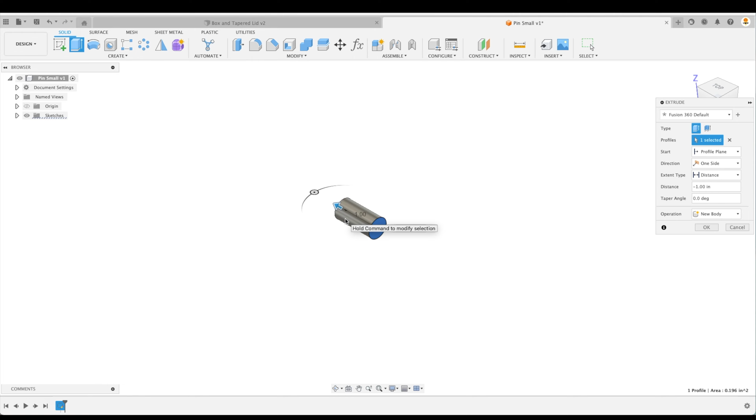In this tutorial, you will make this power piston assembly. You will create each individual part, including the small and large pins, piston, connecting rod and flywheel. We'll assemble all the parts and then verify the assembly by creating a motion study.

Let's do it. So the first thing we're going to talk about with this tutorial is in previous tutorials, we have done something called in-context design. Or as you can see in our browser, we have created two parts within our assembly and have done that within one project. But with this tutorial, we're going to do something a little bit different.

Sometimes we don't have the luxury to create an in-context design. We might be given files from an outside source and have to input that into a project and then model around that file. Or we might have to input several models that have been sent to us and create an assembly based off of those files. So we're going to take that approach today.

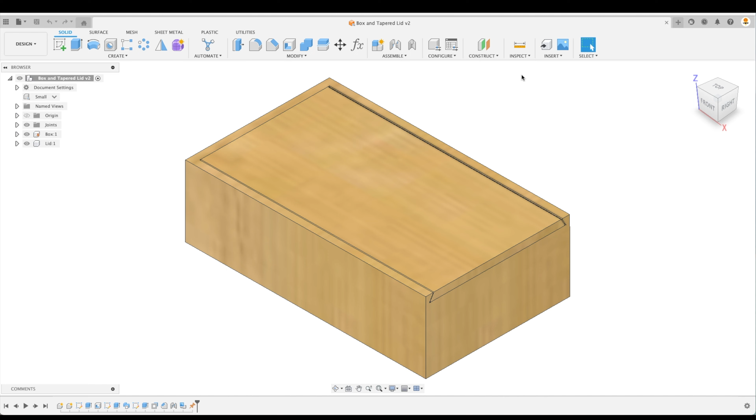So let's open up a new design, and we're going to save everything under one project. And here I've named the project Power Piston Assembly Tutorial. So when we locate that folder, all of our models will be saved within this particular folder. And then we'll create a master assembly file where we will input all of those individual files into.

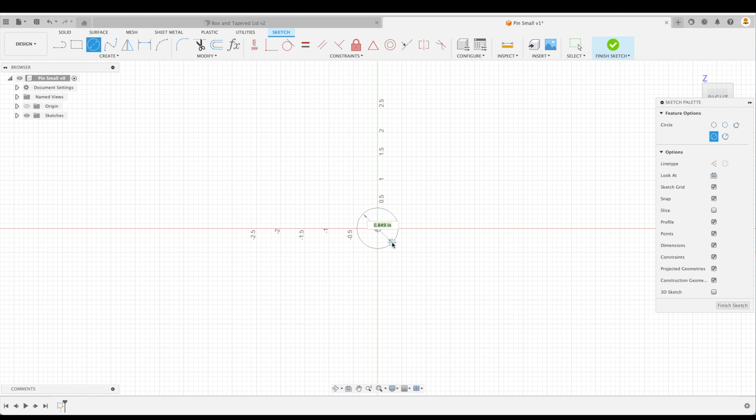So let's get started with the most simple aspect of this assembly. Let's first of all create our pin. So let's save it and call this pin small. And this is very simple. We'll create our sketch on our YZ plane, center diameter circle. So it'll be 0.5, finish sketch, and we will extrude this 1 inch. And that's it. Let's save it. You can see as we save it, it will be located in our folder under Power Piston Assembly Tutorial.

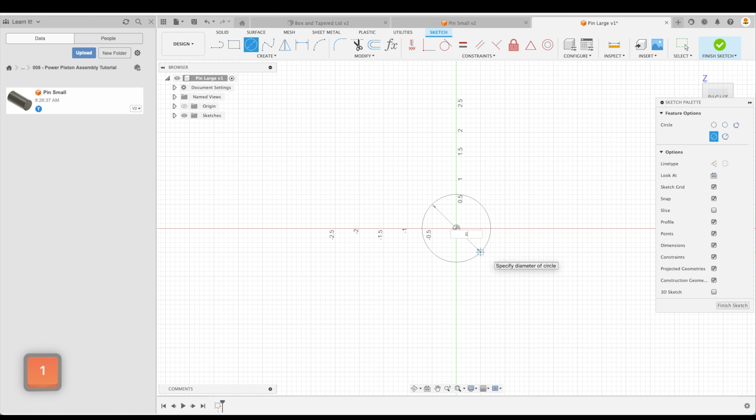So now let's create our large pin. We'll save it. Pin large, and for most of this tutorial, I'll just leave the browser up here on the left. So here we'll create another sketch on our YZ, and this one's going to be 1 inch in diameter by 1 inch long. So E for extrude, and we'll go the opposite direction 1 inch, and that's it. Now let's do our next one, which is our cylinder.

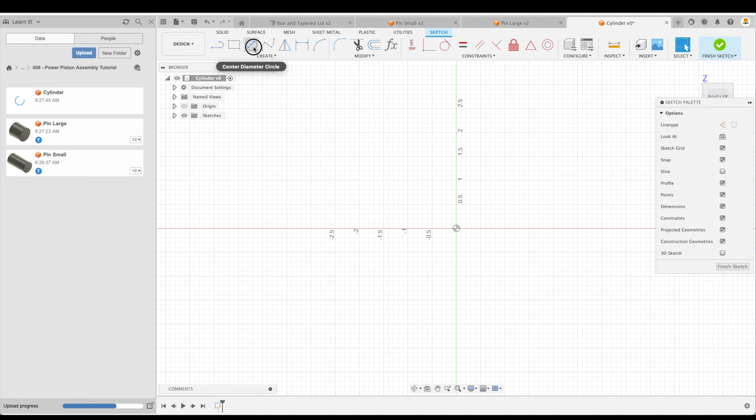So sometimes if our part doesn't show up here on the left, which we have just saved, we can refresh it, and it should show up on the left. So let's save this as our cylinder. And again, we can create our sketch. Now this one is 2 inches in diameter with a bore set at 1.5 inches. So we can finish that sketch. And now we can just extrude that outer profile. And this is going to be 5 inches long. And that's it. Let's save.

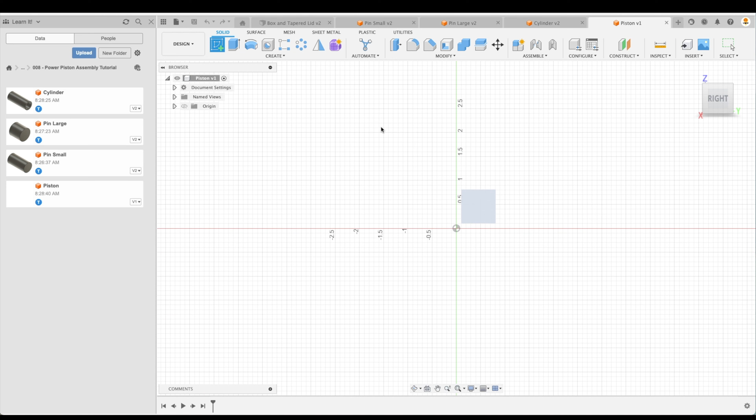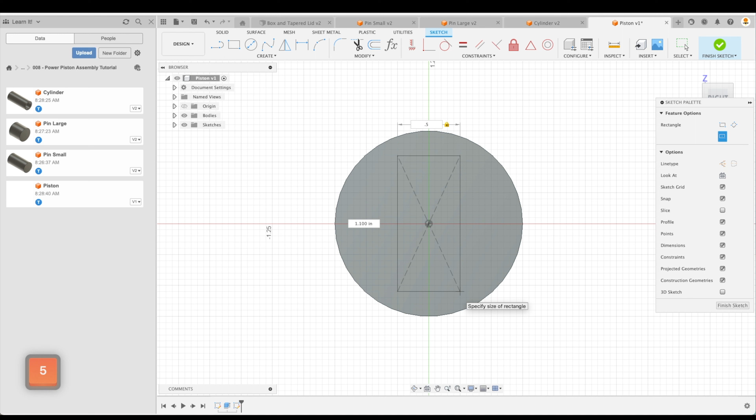Next, let's do our piston. This is going to be a solid body on our YZ plane of 1.5 inches. And we can extrude that -5. And let's create another sketch on our front face. Make sure not to pick the YZ plane, but the front face of our cylinder. And we'll create a center rectangle off of our center point. And this is going to be 0.5 by 1.25 tall. Finish sketch. Now we can extrude that profile. This is going to be 1.5 inches long.

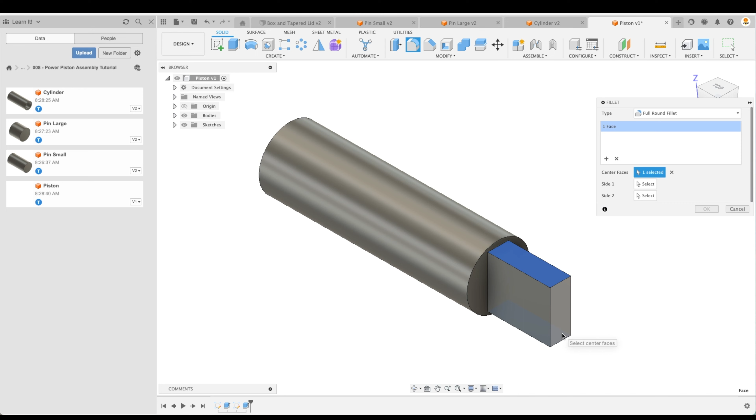So for this, we can create a fillet and make sure to select full round fillet. Now you can see as I hover my mouse over the face here, the side walls turn blue. If I were to click right now, the fillet is created in this direction. So that's not good. So all we have to do is move our mouse down, and you can see now our blue faces are going to be on the top and the bottom. And if we select, we'll create a full round fillet from top to bottom in this instance. Let's go OK.

Now we can create the hole in the middle here. Let's create a sketch there. Now we can just create a center diameter circle. And again, we can use constraints to make sure that it is perfectly placed right in line with this fillet, or we can say concentric within that fillet. But just to show you how easy it is to create using constraints, let's just create the circle off of here, our bore of 1/2 inch.

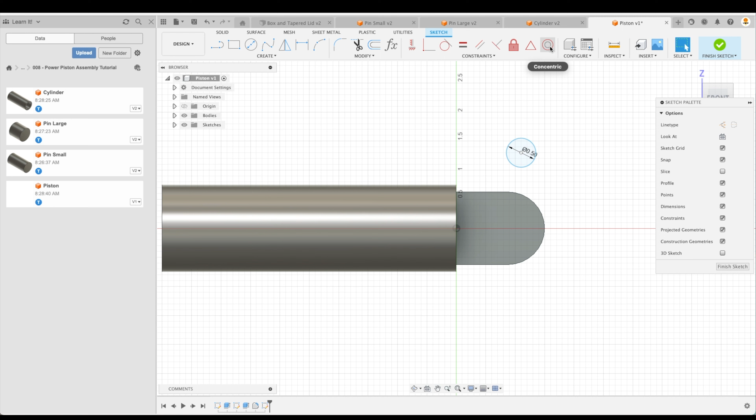And then use the concentric constraint. So we'll click on that, click our circle, and then just click our radius here. And there we go. It's perfectly placed in line or concentric with that profile. Let's go finish sketch. And now we can extrude this. Make sure to go to object, and we can just pick the other side of our piston there.

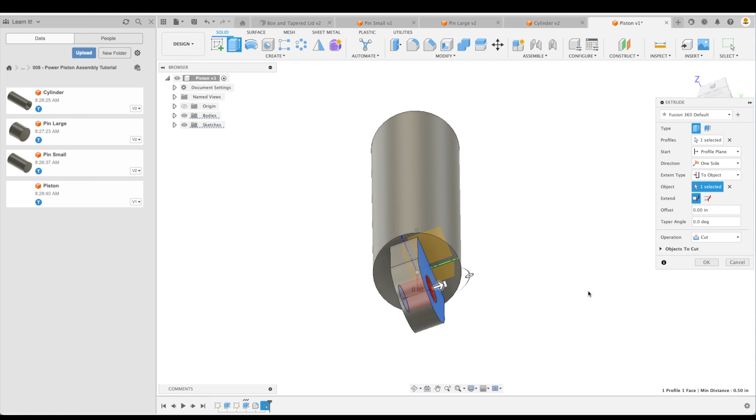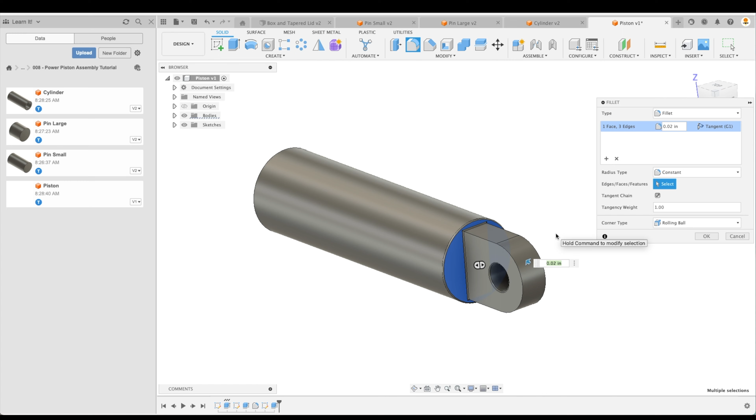Okay. So now we can go up to fillet and make sure to select our regular fillet. And now we can actually select this entire face here and just put a tiny, let's go a 10 thou, maybe a 20 thou on there. Perfect. And we are good to go. Why don't we add these two as well? Okay, now the piston is finished.

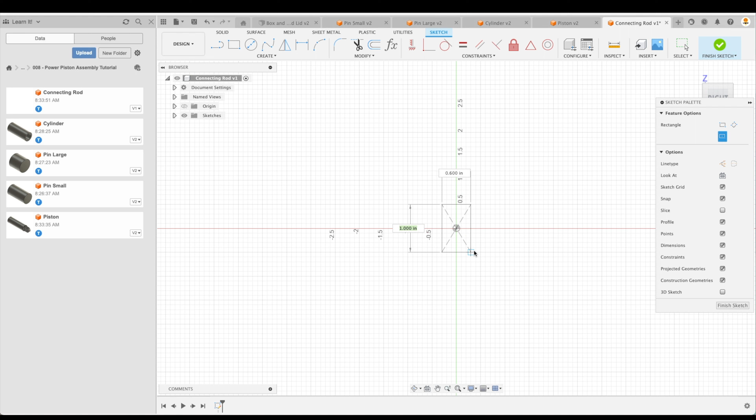The next is our connecting rod. So let's save that right away and call it connecting rod. So the first thing we can do is create a sketch. We'll create it on our YZ plane as well. And this is going to be a center rectangle. This is going to be 1 inch high by 0.5 wide.

And we can extrude that. This is actually going to be a calculation. We can go 9.625 minus 2 inches. And a good thing to remember while we're modeling is do all of the primitives or primary shapes first, and then do the fillets and the rads and the holes at the very end.

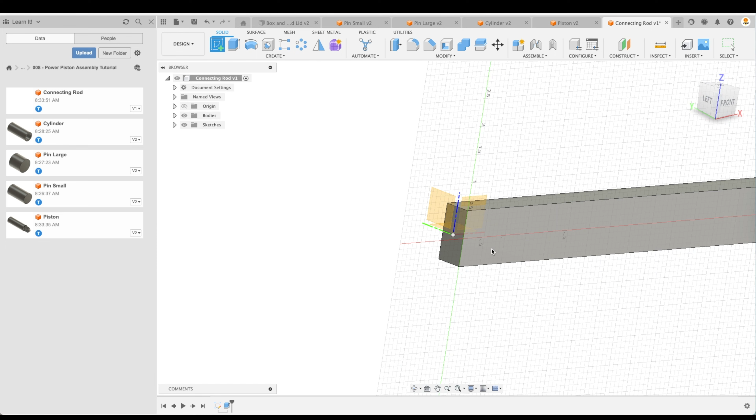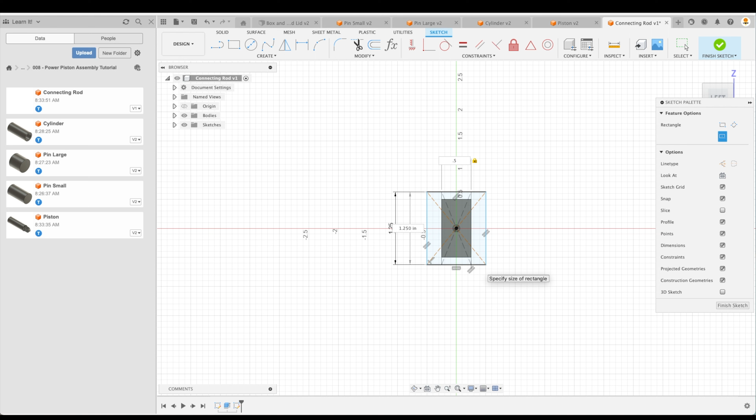So let's do the other side of our connecting rod here. We'll create a sketch on this face and another center rectangle. This is going to be 1 inch wide by 1.25 tall. And it's actually going to have a 1/2 inch spacing in the middle. So we can just put this at any distance as well and then constrain it later, or we can just specify 0.5 right there.

Now you can see that there's blue lines up here, and that's because it is not constrained. So if we hold down our left mouse button, we can pick that individual line, and there we go. You can see it's not constrained. So if this happens to you, it's best that we create a collinear constraint between that line and this, and then everything will turn up black. Now this still has not been constrained. I didn't specify a dimension for that, so let's just go D. We can pick that edge, and call this 1 inch exactly.

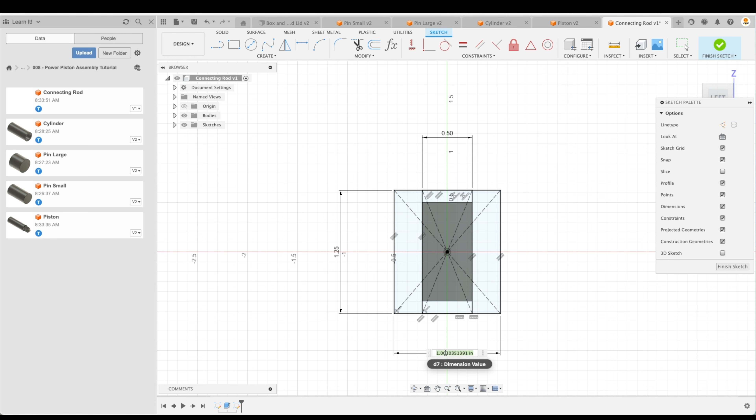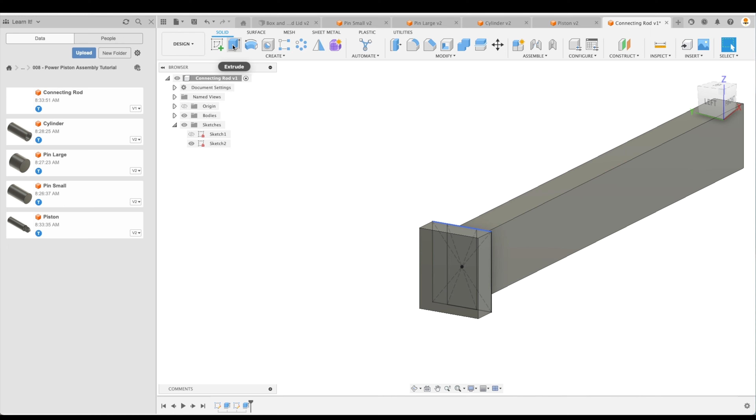Let's finish our sketch. Now we can extrude it. So let's extrude this. And actually we'll extrude all of these. And this is going to be 0.375. Now we can bring up that sketch that we just made, because we're going to extrude just those outside profiles, and we can hide our body there. Let's just extrude those outside profiles, turn back on our body, and these are going to extend 2 inches, and make sure that our operation is not set on cut, but rather join, and that will join everything together.

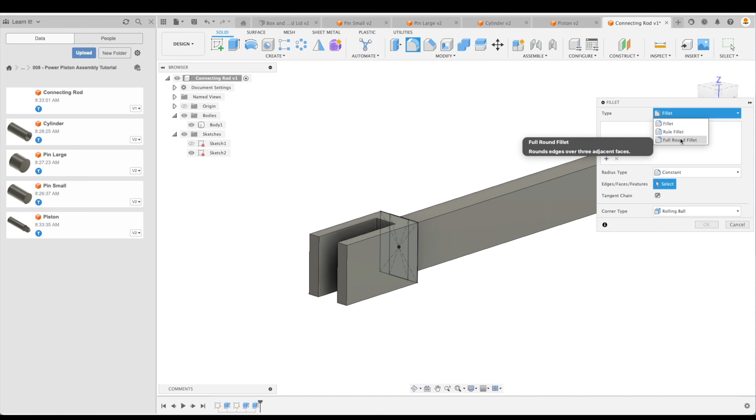Let's go OK. Now that we have our primitive shapes, we can add our fillets. So let's go there, fillet. And we can go full round fillet like we've just talked about. We can select that. I'll have to add another selection set right there. And another selection set on this side. And make sure to hover our mouse so that the blue faces go on the top and the bottom. There we go. Let's go OK. We can hide our sketch now over here. And all we have to do is add our holes and then some of our tiny fillets.

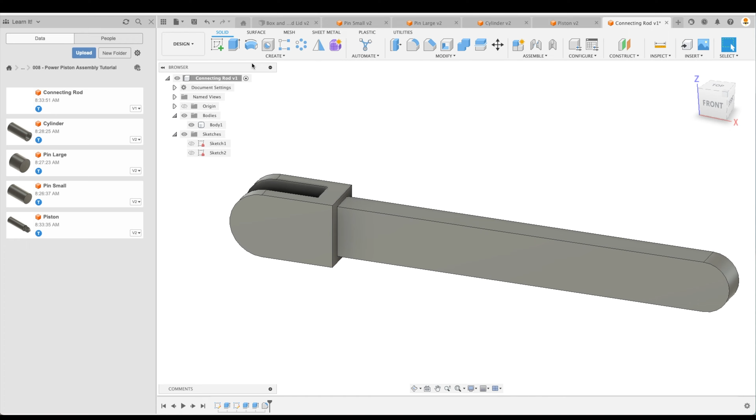So let's do that. Create sketch on this face. Again, we can create a circle off into space. It can be anywhere really. This is going to be 0.5, and then make it concentric to our profile there. Let's finish our sketch. And I like to create all my sketches at the same time if possible, so I'll select that face as well.

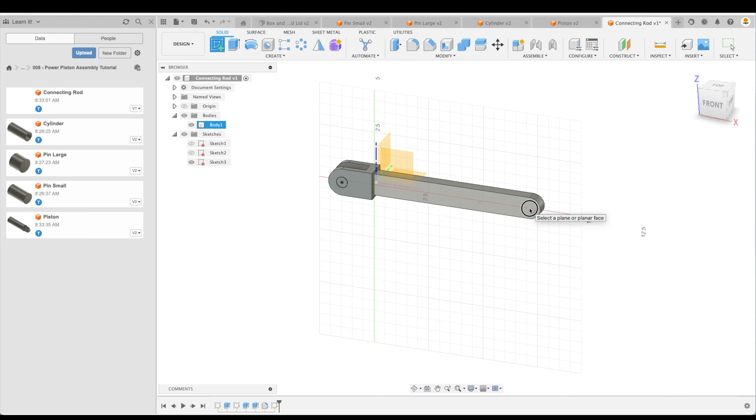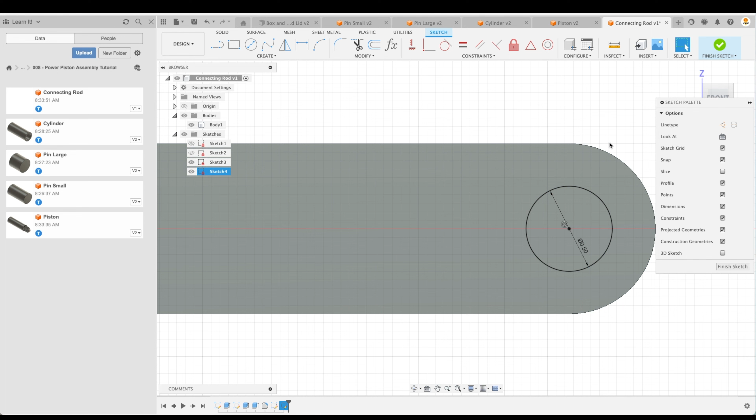We can also just select our circle, hover over that, and you should be able to see a little circle symbol show up. And this is the center point of our rad. And as you can see, the concentric symbol shows up there, which means that our circle is perfectly concentric with our outside profile here. So let's go finish sketch. And now we can extrude that and go to object, which is the other side of our connecting rod. Go OK. And we can do the same thing here. Pick that, distance to object, the opposite side, and go OK.

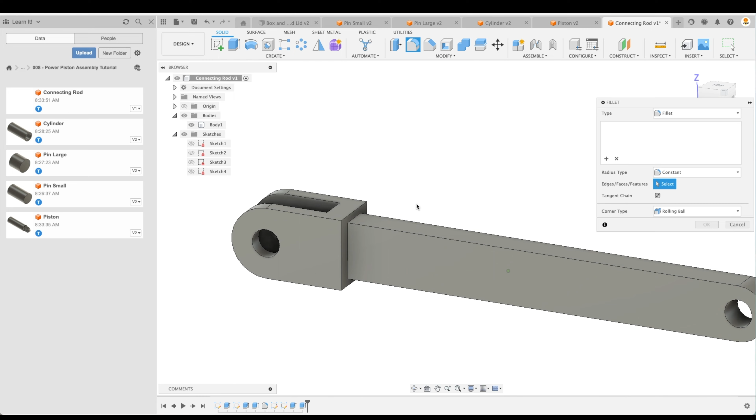Now let's just add a couple small fillets. Make sure to select our regular fillet there. And again, we can pick that entire face, and we'll call that 25 thou as well. And why don't we pick all those? Perfect. And these ones as well. Okay.

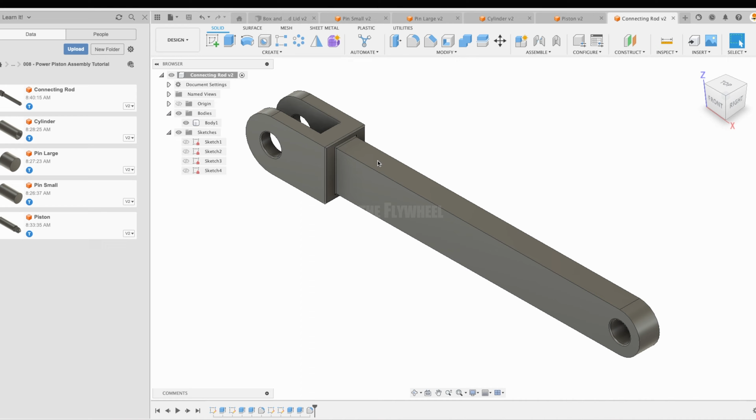Now last but not least is our flywheel. So let's save that as our flywheel. And this, I think, is the funnest part of this project. So let's create our sketch now on our XZ plane. We'll create the outer profile of our flywheel first, which is 4 inches. And we can actually create all of our different profiles at this point too. So our center circle is 1 inch.

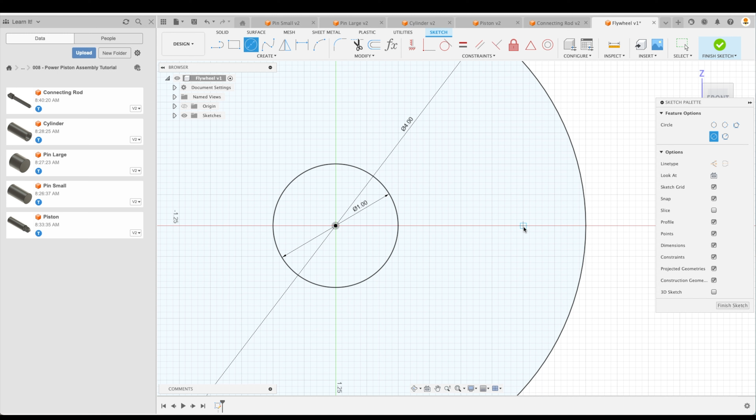And again, to select the previous tool that we've just selected, we can right click and there we go, repeat center diameter circle. Now we want to create a through hole over here. And as we select our x-axis, we can just snap it right to that. This is going to be 0.5.

But as you can see, it is not constrained to anything. We can move that. So we have to make sure that this is fully constrained. We can do that by selecting the horizontal vertical constraint. We'll select the point there and our midpoint. And now all we have to do is a dimension from our center to center. And this is going to be 1.5. And it should turn black now, fully constrained.

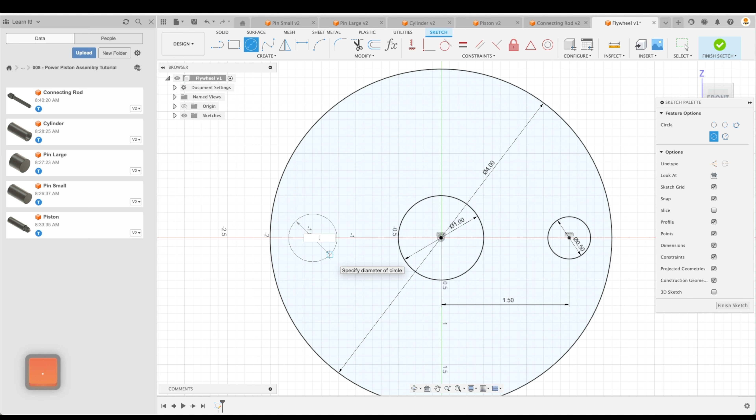So we're going to do the same thing on the other side, which is going to be our wheel. This is going to be 0.5. And we'll make it the same spacing from there to there. We can actually just select our dimension over here to input it into our current dimension. So let's do that. And you can see that it is not constrained. It's still blue. And which direction does it need to be constrained?

Well, you can see as we click and move it, it often gives an indication of what needs to be constrained. So let's just pick our horizontal vertical constraint and we'll pick the 2 center points. And there we have it. So let's finish our sketch.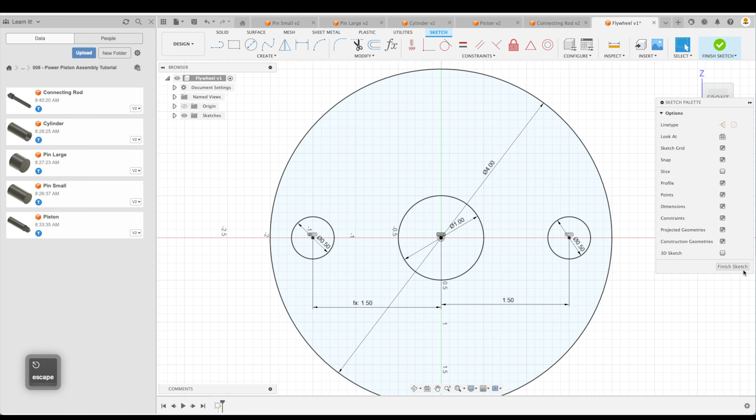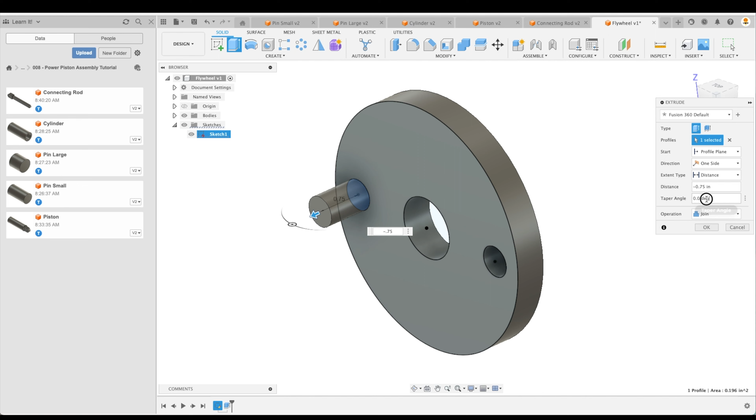Now let's extrude these 2 profiles in this direction, and it's going to be 1/2 inch. We'll bring our sketch back up because we want this profile to be going the opposite way. So we'll pick that and we'll go opposite minus 0.75. And we're going to add a little taper angle to this. Let's go 10 degrees and it puts a little handle on there. So let's go OK. And we could also put some fillets on there if we wanted. Let's do 1, 2, 3, 4, and call that 25 thou as well, and save.

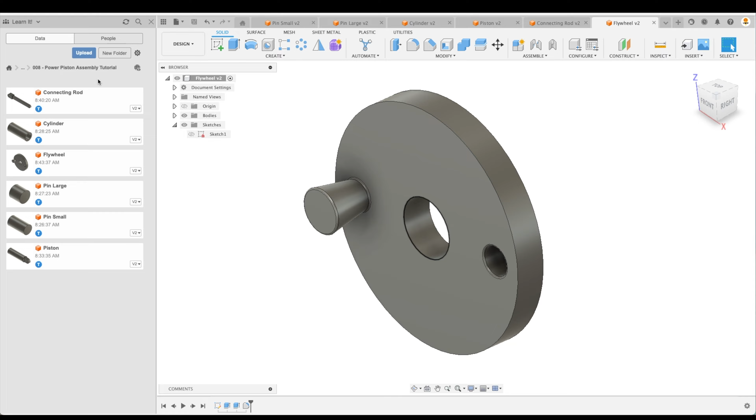So you can see that in our data panel, we have all 6 files that we've just created. So now we can create our master assembly file. We'll create a new design, save it, and this will be called Power Piston Assembly. Let's go save. So now we just input one of these files or models at a time into our master assembly. So let's start off with our cylinder.

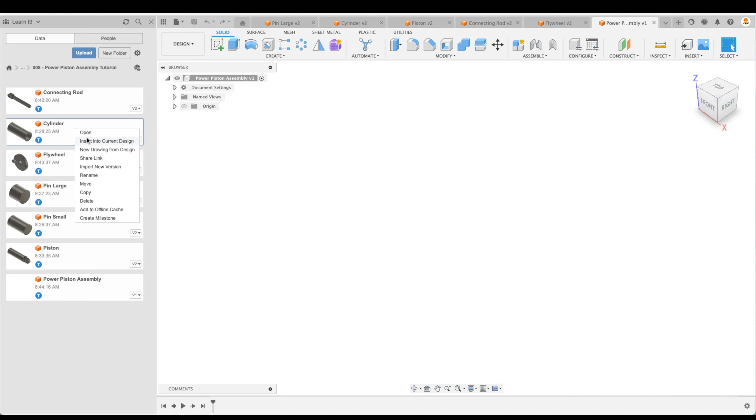So we're going to right click, insert into current design. We've inserted our cylinder and we can go OK. We could move it or orient it if we want, but let's just go OK. Now we actually want our cylinder not to move at all. So let's just right click that cylinder and ground it. If we don't ground it, it's going to be flying all over the place as we move our piston assembly. So the next thing we want to do is input our piston.

So here we have to make sure that our assembly is activated. If we have a large assembly of many different parts, we may at some point activate an individual model. And as we insert a new model into the design, it will actually put it underneath that model rather than underneath the assembly file as our parent file. So just keep that in mind; if I do it accidentally or have an opportunity to show it, I will. But let's just keep on moving here.

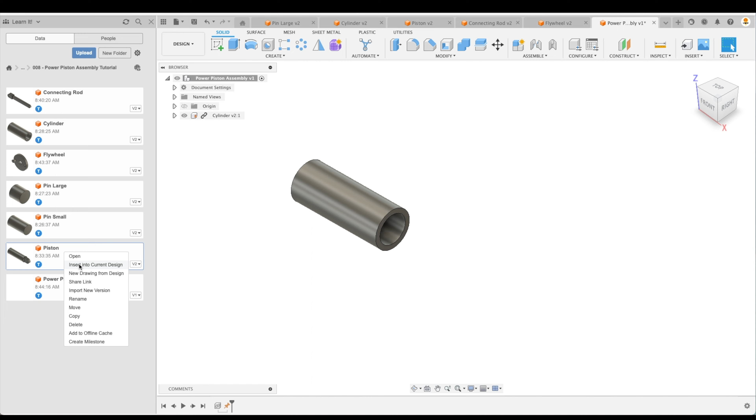So let's go to our piston now, and we're going to right click, insert into current design. And it's actually positioned exactly as we want because that's how we've designed it. So let's go OK. But if it's not positioned exactly where we want, maybe it's off to the side, we will have to joint it. Or we're going to have to joint it anyway, so why don't we do that right now? Let's go joint. And remember the fundamental rule, this to that in Fusion 360.

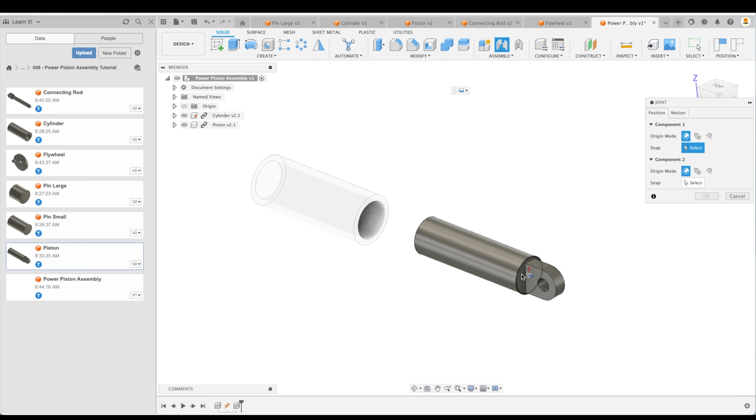So the first component that we pick is this, and we want to move it to that. So this to that. And that's why our cylinder turns up transparent. We can't actually select anything on it because we can't move that. That kind of gives you the indication of which component needs to be moved first. So we need to snap a point on this to a point on our cylinder. Now I want to snap the center point of this face to the center point of that face. So let's do that. And this is fundamental.

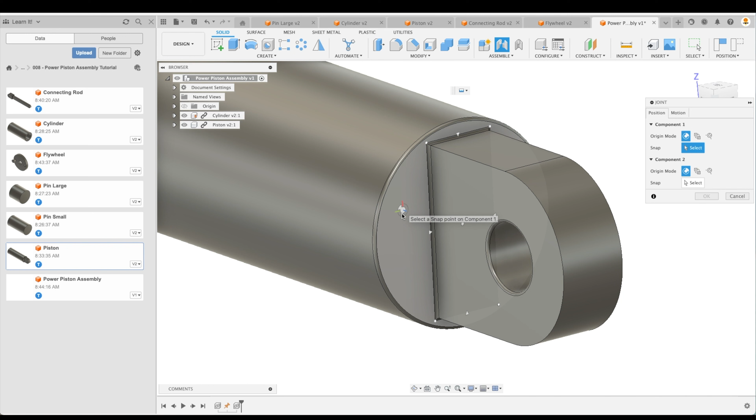If you can really pay attention, some of my students just don't understand this concept, and I'm sure that others out there don't as well. So here we want the center point of this face. And as we move our mouse over, you can see it selects this face instead. But no, we want that center point. So how do we do it? Well, there's 2 ways of doing it. We can select our face, we can click it. And there, now we can pick anything on that face without it selecting anything else in our model.

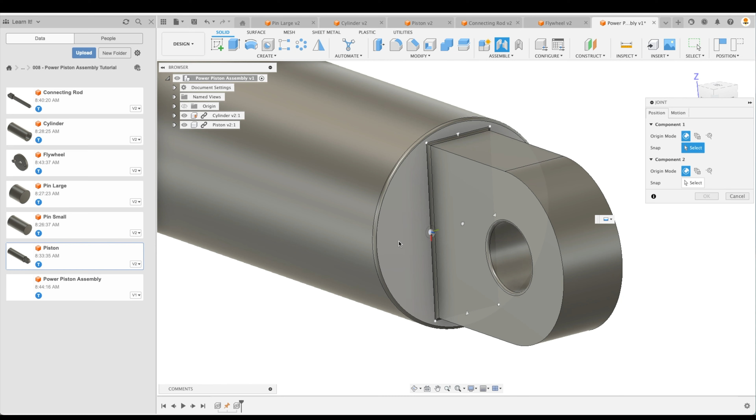So we can do it that way, or we can simply hold down Command on a Mac or Control on Windows, and you can see it does the exact same thing. We can pick any point on that face that we have pressed Command or Control. So we can do that, select that point. Now that turns transparent, and we can do the same thing over here.

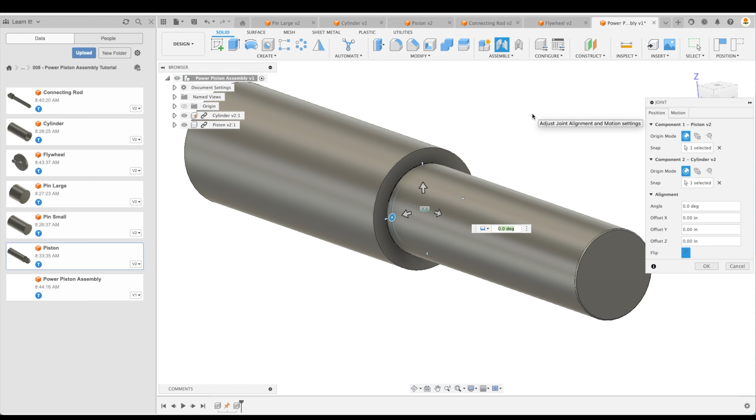This we absolutely need to do. I'll do the other method. I'm going to click on that face, and now we can select the center point. So you can see Fusion says, well, this makes more sense if we orient it like that. Simple, we can just flip it, and now our piston and cylinder are properly jointed.

Now we want to make sure to add some motion to this. So let's go to motion, and our type is going to be slider. And you can see it's sliding in that direction. That's great. It might be the opposite axis that you've picked, or it might be another axis that you've picked by mistake. So if it is, don't worry, just go down to our direction here and make sure that the correct axis is selected. Now we can also add a custom axis if we want, but in this case, one of the three will work.

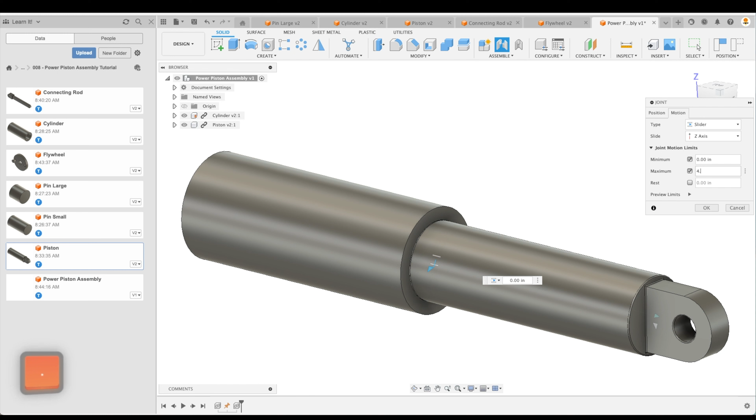Now we want to add some motion limits to it as well. Our minimum is going to be 0. Our maximum is going to be the length of our piston, which is 5 inches. Well, we shouldn't actually do all the way to 5 inches. In real life, that wouldn't work. The piston would obviously fall out. So we're going to go to 4.75. There we go. And our rest is going to be back at 0.

So again, this is the default position of our piston and cylinder. When we hit OK, even if we are off into space over here, oh, there we go. So as soon as we hit stop, it will go back to our rest position, which is at 0.

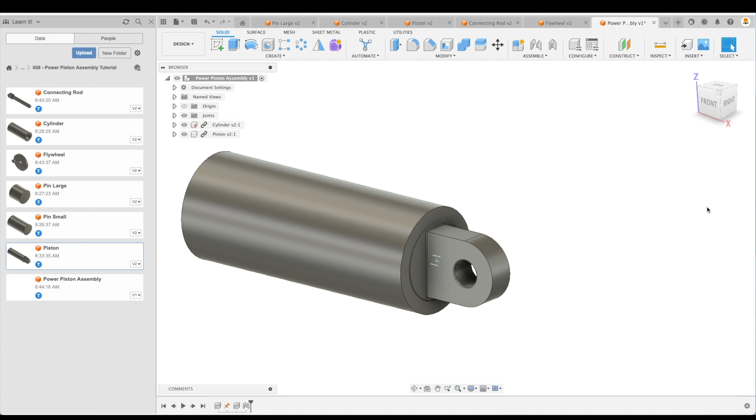Now the next thing we're going to do is add the small pin over here. So let's go there, insert into current design, and we're going to move this small pin off over here. We don't actually have to orient it right now. We can if we want, but I'm just going to leave it at 0 degrees just to show how easy it is to join two components together. Let's go OK. So let's joint, and we can snap our first pin over here to our piston.

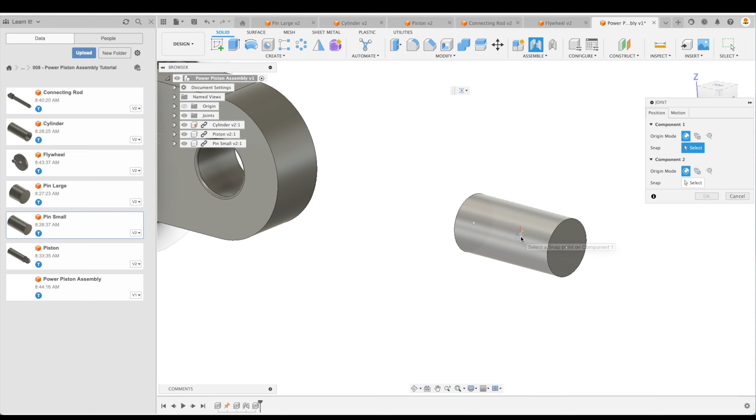So as we hover over a cylinder, you can see that we only have 3 snap points. We can't pick anything on the diameter because the diameter has an infinite amount of points. It doesn't know which to snap to. But as we hover over the center of our cylinder, there we go. We have a center point that we can snap to. So let's do that. And we can snap to the center point over here.

How do we do it? Well, same principle. We can hover our cursor over that cylinder, press Command or Control, and now we can select that center point. Remember, we can pick any snap point that's found on that. So we want to go to the center and click it, and look, it automatically orients our pin in the correct orientation.

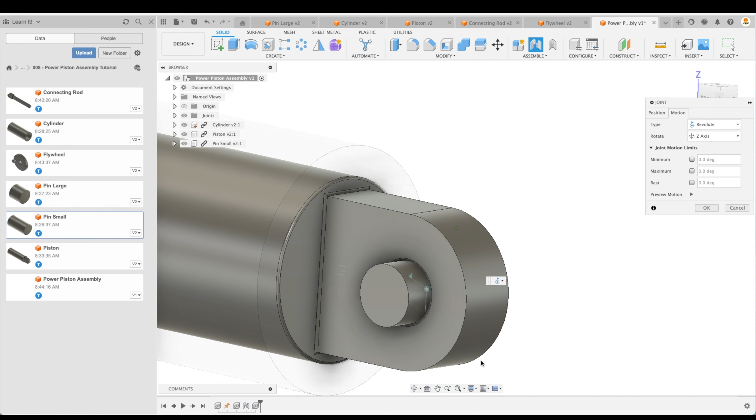Now, obviously, we don't want a slider motion to exist here. So we want to change this back, and we want to turn it to revolute. And here you can't see it doing anything because it's a round object, but you could see that little wheel, the motion limit wheel here, spin. So this is perfect. We can actually go preview motion, and there we go. We see that our pin is revolving 360 degrees, no problem. Let's go OK.

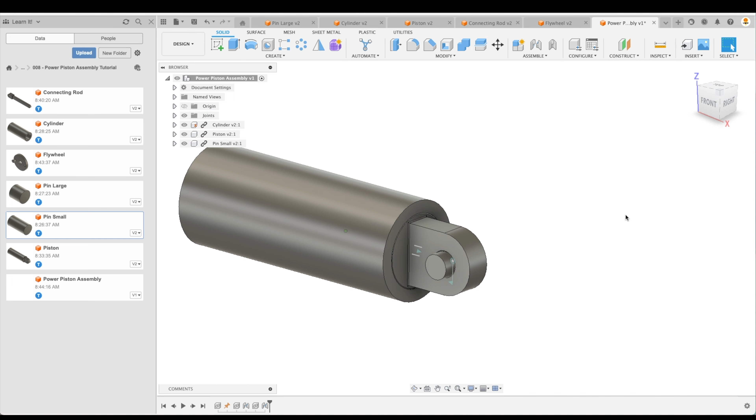Now let's assemble our connecting rod. So right click, insert into current design. Again, here we're just going to move it off into space so that we can see it a little bit more. And now let's go joint, and we're going to choose a different type of joint here because as I hover over this cylinder, you can see that our center point, we want the center point between both cylinders, right dead center of the connecting rod. So how do we do that? Well, this is quite easy.

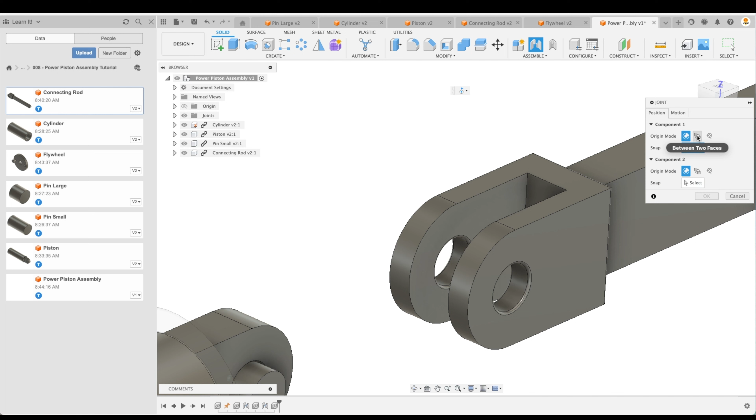You can see under our origin mode here, right now we have simple selected, but we want between two faces. And just look at our little dialog window: creates a joint origin that is centered between two selected faces to position components. So let's do that. We're going to select that. Now plane 1 is going to be this plane or this face, and plane 2 is going to be that. And now it asks for a snap point. So we can hover our mouse over here and select any snap point we want.

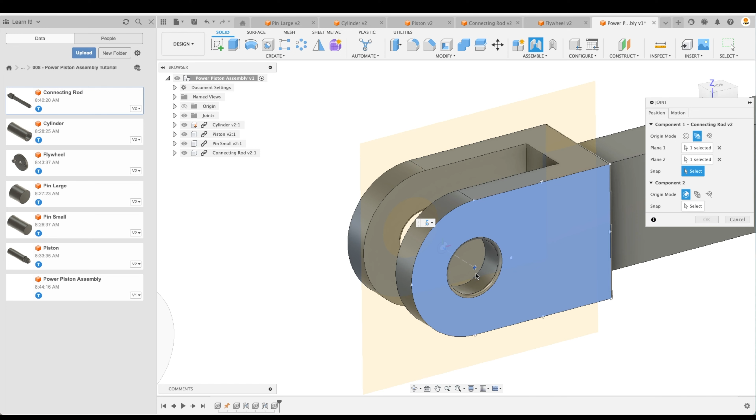So again, we're going to hover over that face, hold down Control or Command, and then pick the center. As we orbit a little, you can see that the center point is right there. So we're going to select that, and your center point should be right in the middle of your two bored holes.

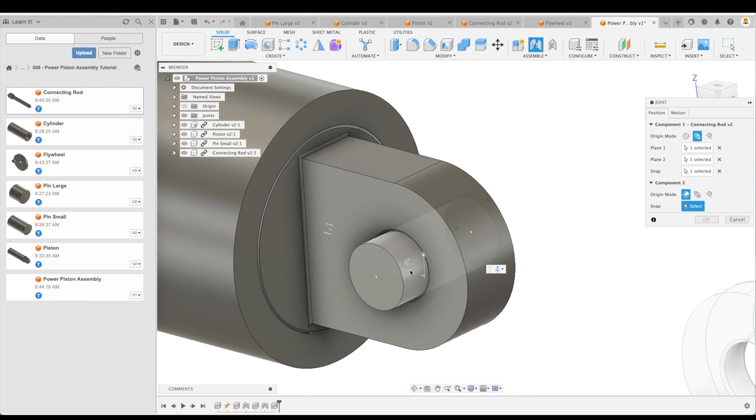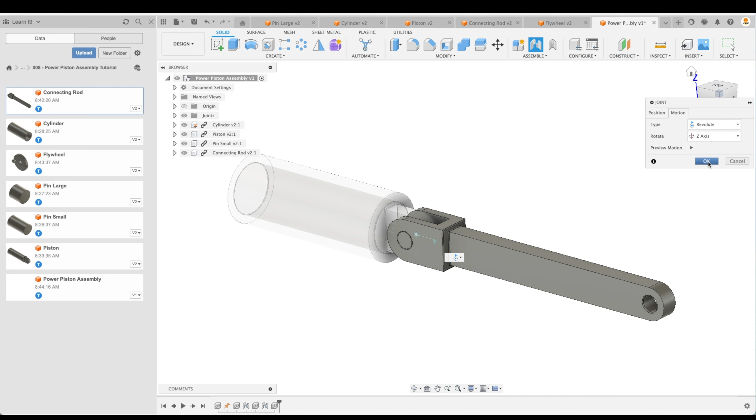Now we can select for component 2, the center of our pin here. We're just going to hover over the pin again, hold down Command or Control, and we can select any of those points, the outer points or the center. Let's select the center. Revolute is on, which is great. Let's go OK, and the motion can be infinite, we don't have to worry about that. But try and make sure that our connecting rod is perfectly in line with our piston and cylinder. That's going to save you a little bit of aggravation later.

Let's keep on moving here. Next thing, we're going to add the next pin over here. Let's do that: pin small, insert into current design. You can see we actually already have a pin small. Well, that's okay, that's the brilliant thing, we can keep on adding pins to this, as many as we want.

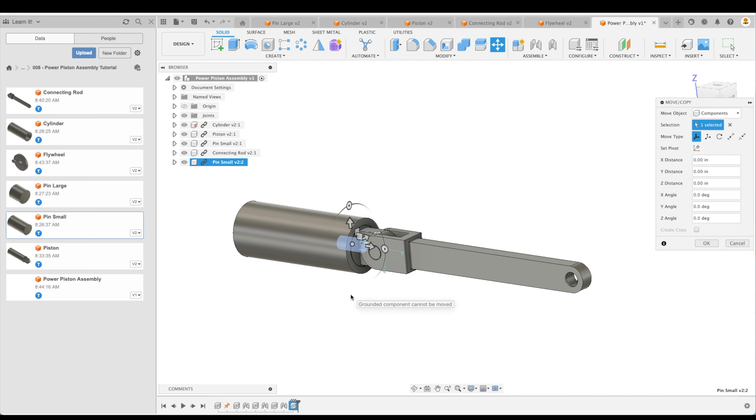So let's go over here, we're going to do the same thing. Joint it, midpoint. I'm going to hover over the pin, Command. There we go, and it's already on revolute, that's what we've been using. So let's go OK. Now we can add our flywheel to the mix.

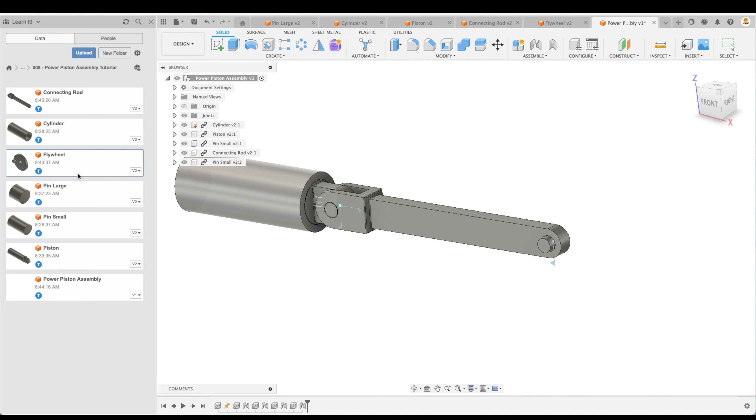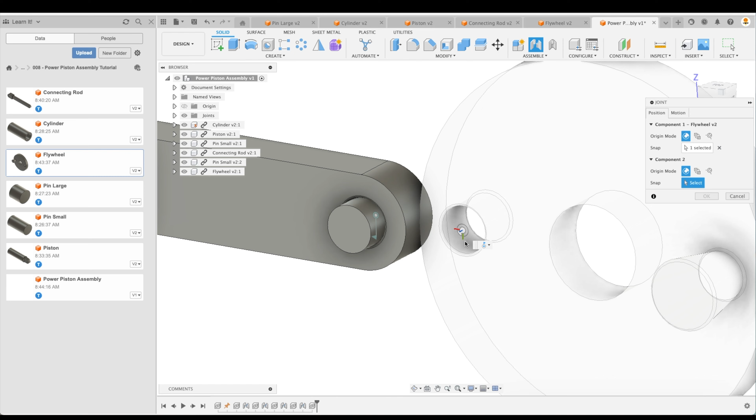We're going to bring this over here, and we actually want to rotate this now 180 degrees. And we're going to connect this hole to that pin, so we can join it. And actually, we don't want to pick the middle point, we want to pick this face right there, and we want to connect it to that. We can flip it, there we go.

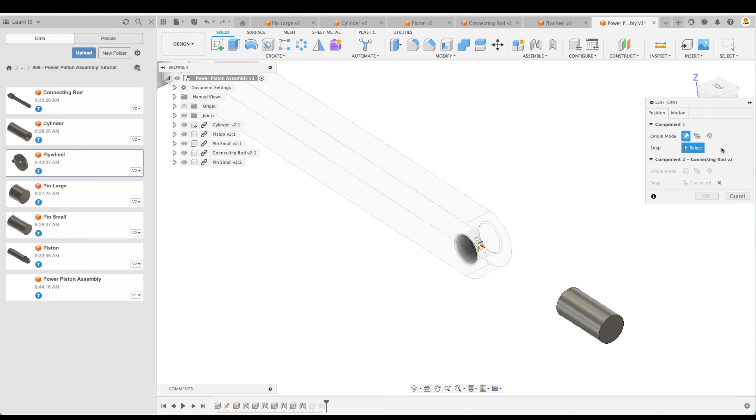The only problem is I actually put this pin in too far, but that's okay. Let's just go OK there. We're going to go back to our previous joint, and instead of connecting it to the center point, let's just reselect our points that we want to connect. We want the end point, not the center of our cylinder, but we can actually go over here. Oh, so in this case we actually have to use Command or Control. There we go, and flip it. Your pin should look like that.

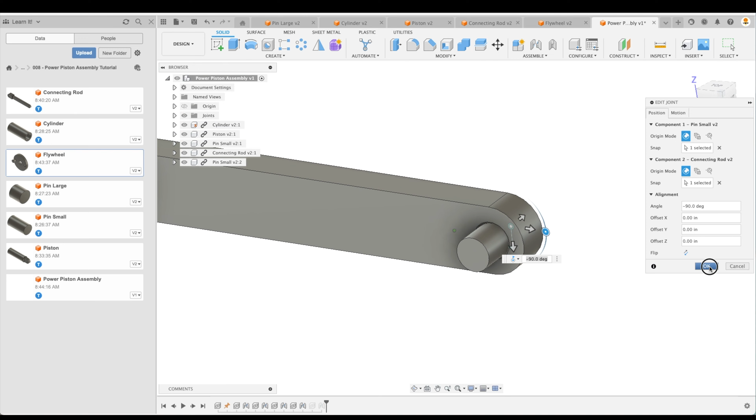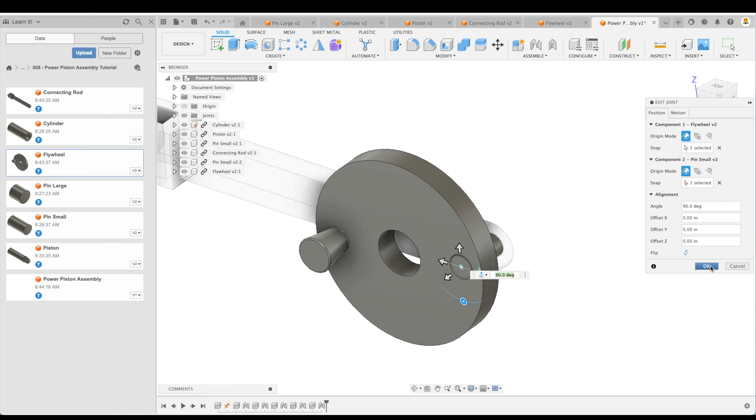So now when we go back to our flywheel, we can flip this now. Well, let's just start again. There we go, so it's that surface, perfect. And we can snap it to that. Excellent, so you can see now our flywheel is actually the wrong type of motion. We don't want our flywheel to move like that. So we're actually going to go OK.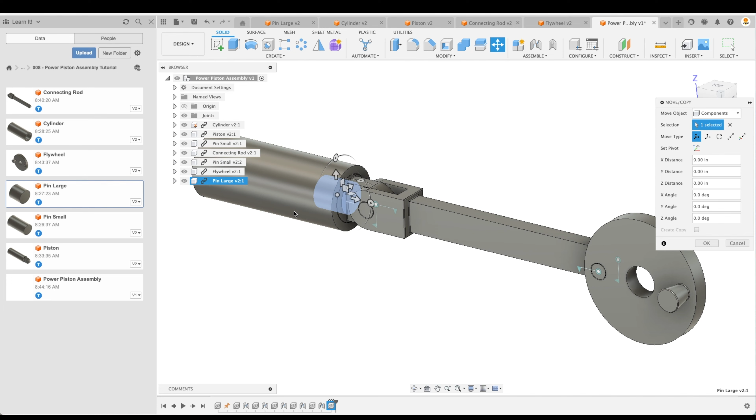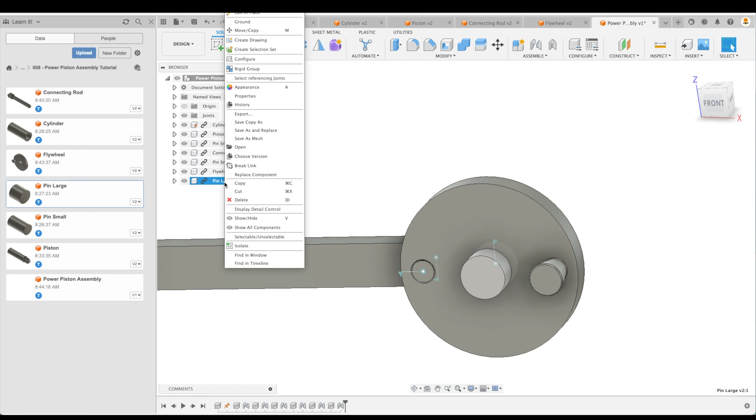And we're going to add our large pin over here and anchor or ground that pin. So let's go pin large, insert into current design. I'm going to move this over there. Now we can join it, that face, to there. Make sure it's flipped. If we had it sticking out this way, it would actually smash into our connecting rod, so let's not do that. And we have to go now to our pin large and ground it as well.

So now if we have designed and assembled everything correctly, we should be able to grab this handle with our mouse and rotate it. Let's see if it works. Well, there we have it, that's looking great, so we can just spin that.

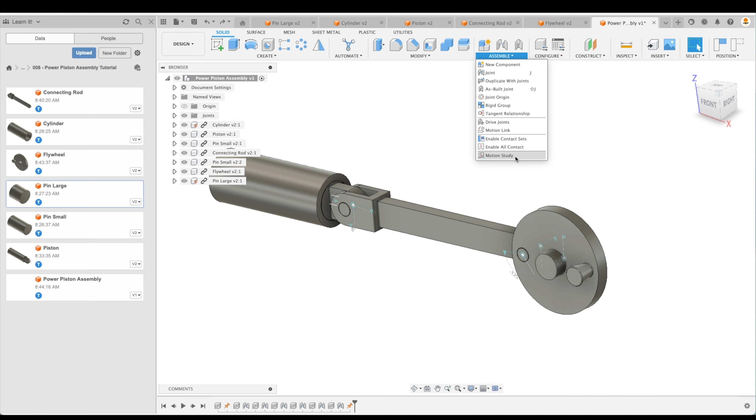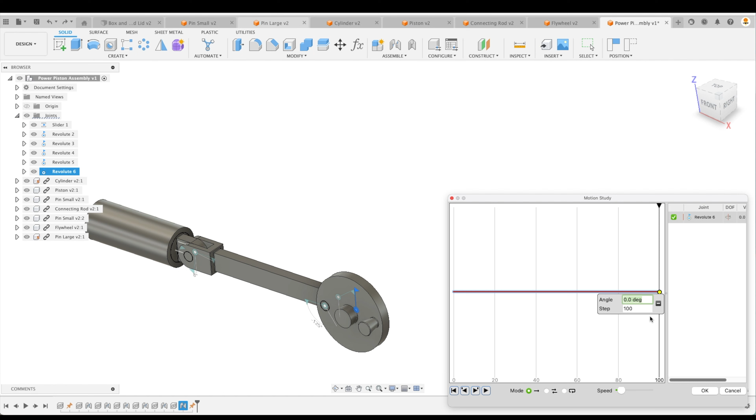At this point, we can actually test our joints by going to Assemble and Motion Study. Now I'm just going to hide the data panel there, bring our piston assembly off to the side. Now we want to select joints to animate, and we can expand joints there, go to our last one. As shown in a previous tutorial, if you haven't watched it yet, it's on the top right of your screen, please watch it to go into a little bit more detail of how to do a motion study. But we're just going to select on our final point here, step 100, and call this 360 degrees for our angle. Enter, and we can press play, and there's our motion.

And if we want it to keep on repeating, we can select that. And there is our final motion.